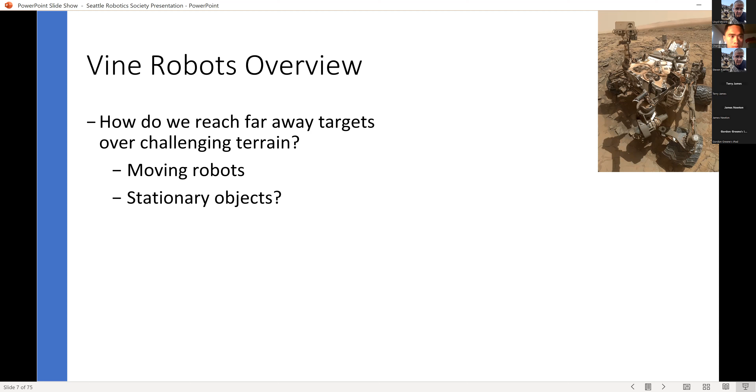But there are other things that navigate challenging environments—what about stationary objects, things we traditionally think of as stationary? In biology we have cells, and cells and plants get to navigate their environments by growing towards them. For example, a nerve cell, to grow to a new area, grows through the tip, navigating through all these cells. In the plant world, you can think about pollen tubes reaching the egg of the plant—these tube organelles grow towards it, allowing the sperm to reach the egg.

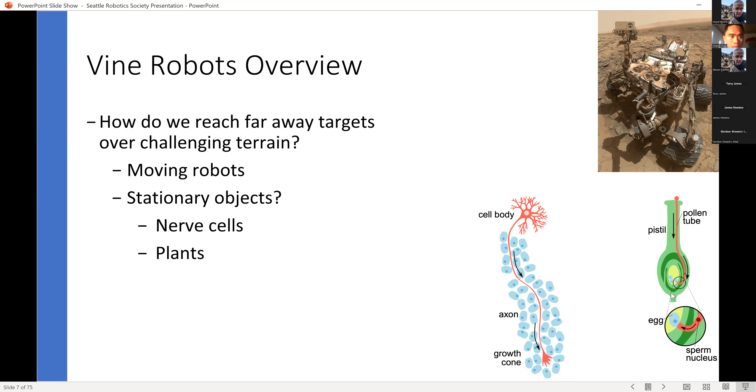So how do we implement growth in our lab?

So we have basically an inverted tube. You can think of it like a sock. When you roll a sock in and out, you get this nice sliding motion that allows you to grow towards a target.

So to robustly grow, what are the advantages of a design like this? Well, one, you're growing from the tip, and you're really not sliding the whole body. If you think about it, like sliding something against a whole bunch of rocks, you're going to get a whole bunch of tears. So if the object is stationary relative to the environment, you're not going to get all that drag from the environment, and you're not going to get caught up with all the detritus on the ground or in your environment. So that enhances mobility quite a bit.

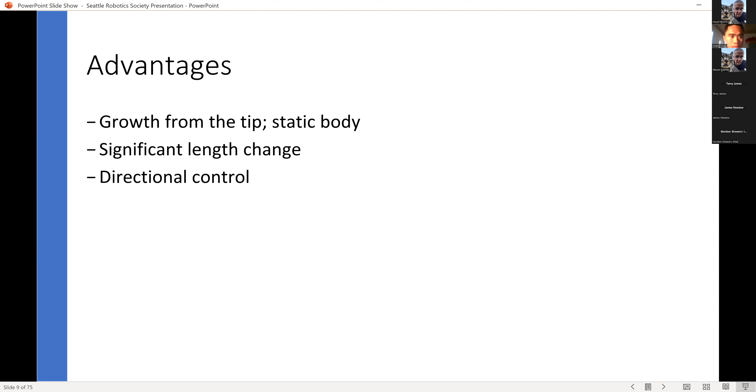Secondly, you can get huge length changes. You can grow these things to tens and tens of meters. And you can also control these because they're quite soft. You can easily control the direction of the motion of these robots by simply changing the strain on each side.

So here's some demos of these robots in action. You've got these robots steering towards all sorts of different targets, and how they steer is they have these pneumatic-based muscles on the side. These pneumatic muscles work as basically a simple pouch, and when you inflate these pouches, they contract in length because their volume increases, and that leads to contraction. By straining and shortening one side, you turn towards that side.

Did that make sense to you all? Okay, I've got a question.

Are you contracting the entire length, or do you have some way to control at which point along the device you're doing this contracting? That's a great question.

I'm not too sure about this particular example, but you are controlling individual segments. Usually you would control a length of the robot. It can either be the whole robot, or if you put a lot of different tubes in, you can control more segments of it. Basically you have to run tubing up there so that you have regions. In this bottom right example, it's definitely making two turns, so there will be at least two sections of tubing for that to occur.

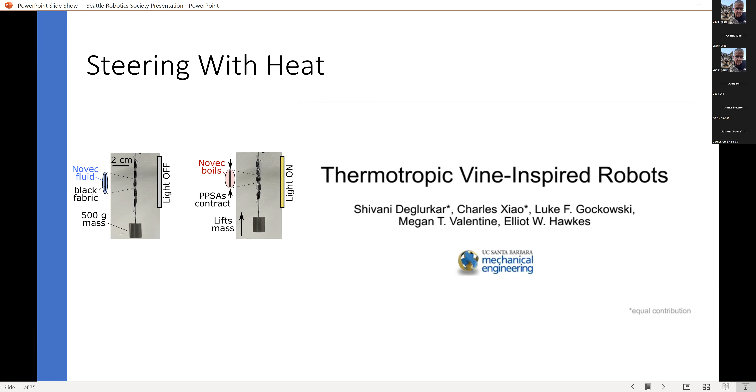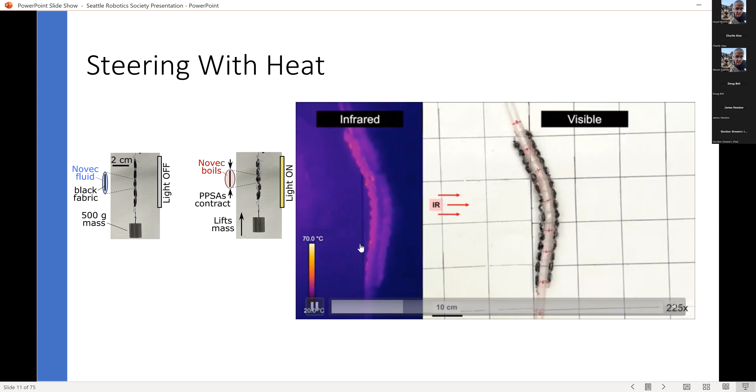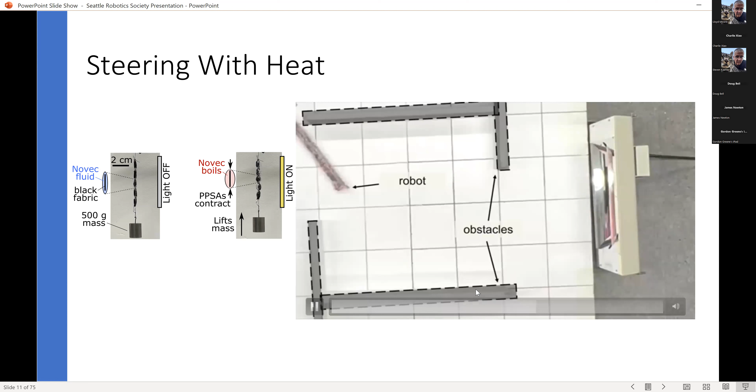This is something I worked on actually fairly recently. Here's a nice video of these robots responding to a localized heat source. You can see how each of these individual pouches have different amounts of heating, and it leads to slightly different amounts of curvature of the robot. Here's some demos of the robot steering towards heaters.

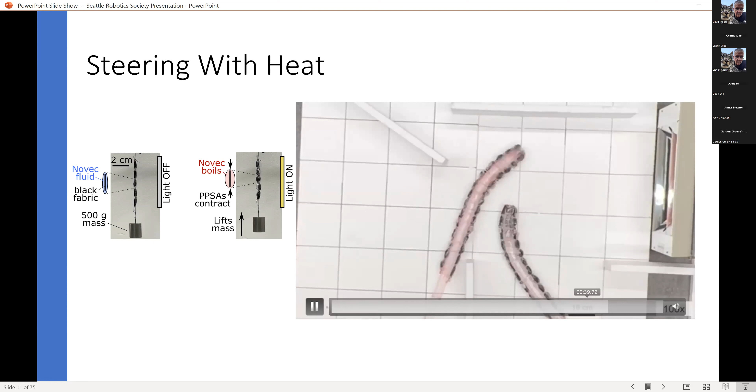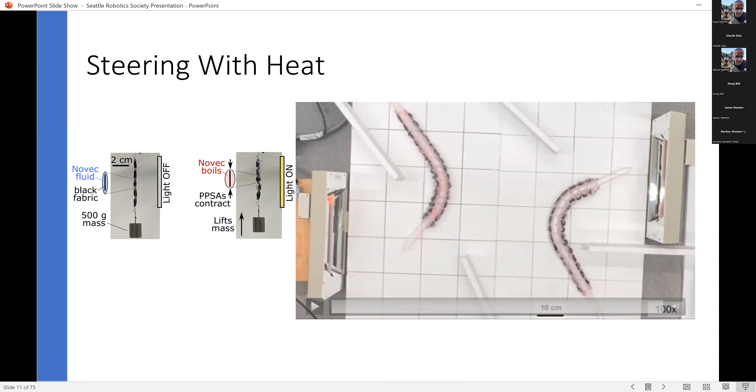So this is some work I worked on over the last year, fairly recent work. Okay, so what are some applications for these robots?

One application is that these kind of remind you of roots. There's tons of naturally interesting reasons you'd want to explore stuff underground. Turns out there's a lot of interesting stuff under the ground in places like Mars and icy moons around the gas giants, so there's all sorts of interesting stuff that geologists are fascinated about. So how do we go underground?

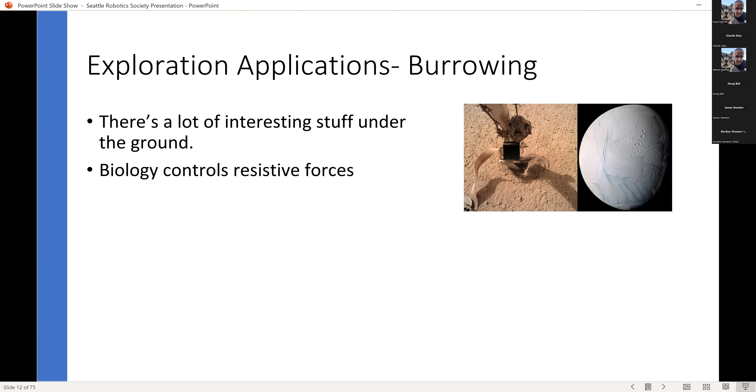One approach is to look towards biology. The way biology burrows underground is by controlling the ground reaction force in the soil, and they do it with three different mechanisms. You have tip extension—if you think about roots, in order to go through all that soil, sliding a root through the ground would take a huge amount of force as it grows through. Then if you look towards animals like the octopus and some types of clams, they do fluidization—they change the adhesive forces the soil has by blasting a jet of water into the sand.

And then with animals like this, what is it called? The sandfish. Yeah, sandfish. They have, their body is asymmetric, so that they can control the ground buoyancy force of the sand around them.

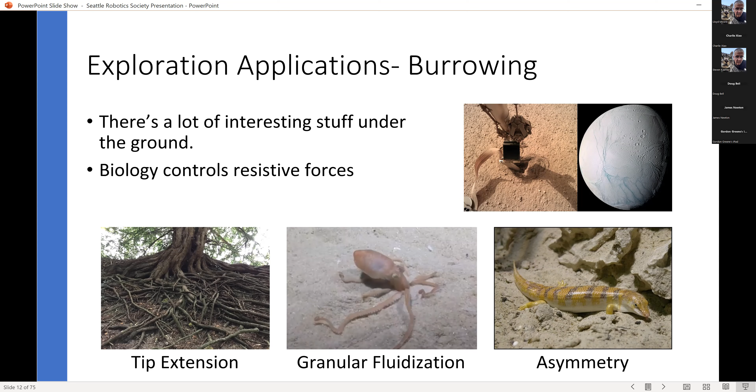So how do we do this with vine robots? Basically, we have three principles. We have tip extension, which vine robots naturally give you, so because you're growing from the tip, you're not sliding through the sand. We also have this wedge that gives you a bit of asymmetry, so you stay underground. And then tip fluidization, so you can control how viscous, how much drag the sand gives you around you.

Related to that, we also have a bit of directed flow. What's interesting is, to stay underground, you actually have to point the jet of air downwards rather than upwards. The reason is that in sand, in granular media, the buoyancy force is a little different than in water. The buoyancy force comes from the difference in lithostatic pressure, and by fluidizing the ground below you, you free up the sand, which reduces the force required to penetrate downward. That prevents the sand below you from pushing your body up, so it keeps you below ground.

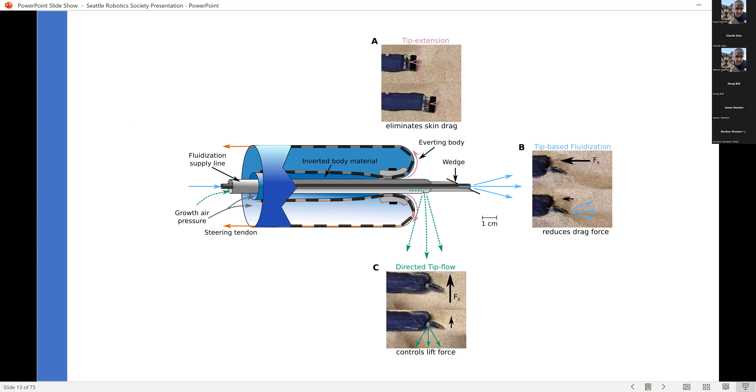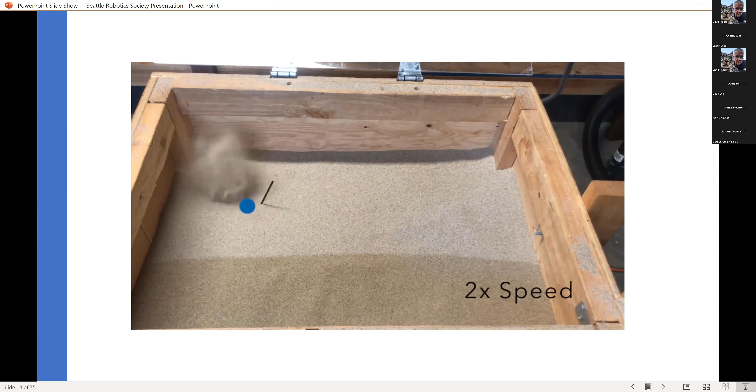So here's a demo of the robot navigating through an obstacle course in the sand. I should have highlighted the obstacles, but there's a whole bunch. This is going through a bunch of sand, and it successfully travels through by growing, and here's where it's fluidized. You can see the sand going all over the place. So we're currently investigating.

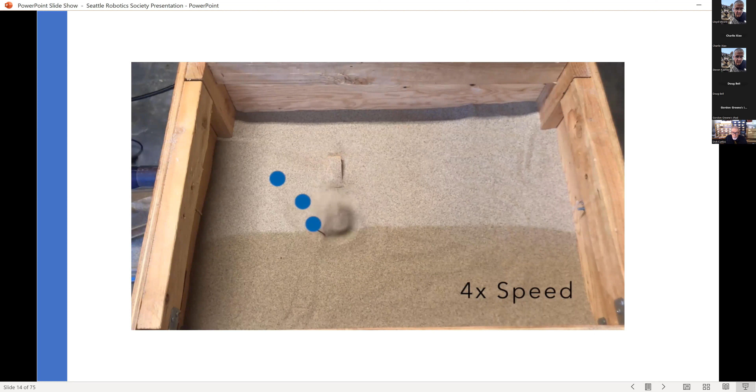How to use these more for future exploration missions on the moon or Mars, and hopefully we'll do some 0G tests. One of my colleagues is working on that.

Another thing we're working on related to growing is trying to put ground anchors into the soil. For example, you might want to put a seismometer underground or a temperature probe, and we're trying to figure out how to burrow deeper. We're looking at adding root-like structures, hair-like structures to these vine robots, so we can get a little bit better anchoring into the ground.

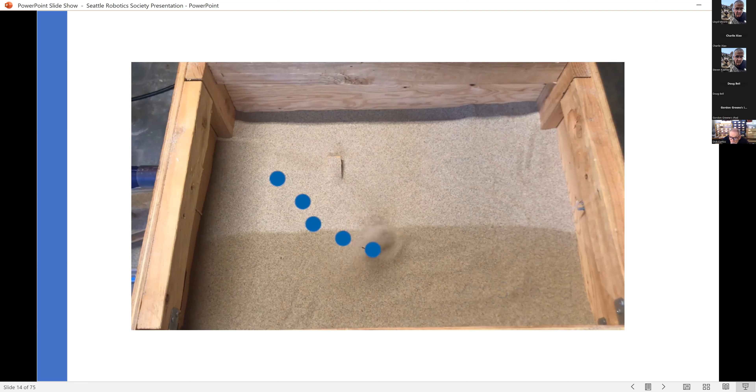The next applications we want to think about are medical applications. If you think about the body, there are a lot of really challenging places to get to. One obvious place is your stomach, right? When we do a colonoscopy, you have to go through the colon, and that's a pretty challenging environment to navigate. Those are potential extensions, and also different vascular structures in your body.

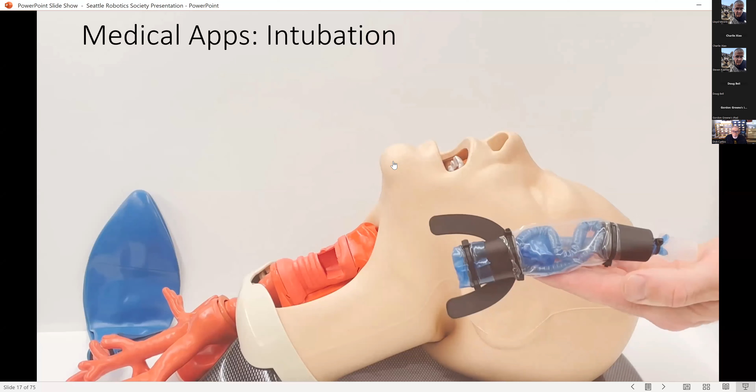We have a whole bunch of different collaborations with medical institutes working on developing vine robots for medical devices. But the real big focus right now in our lab is intubation, trying to get airway management for when we can't breathe and you need forced oxygen into your lung system.

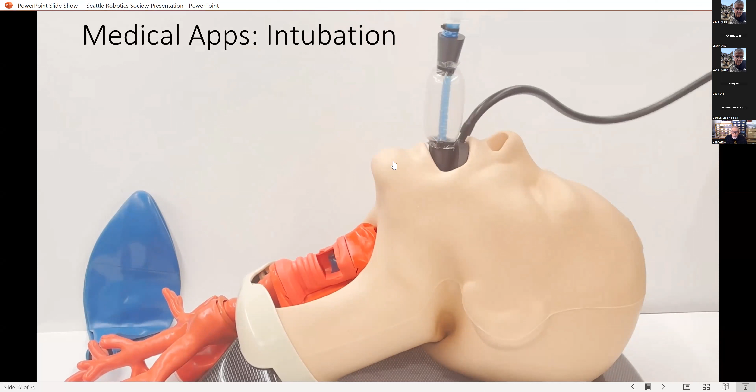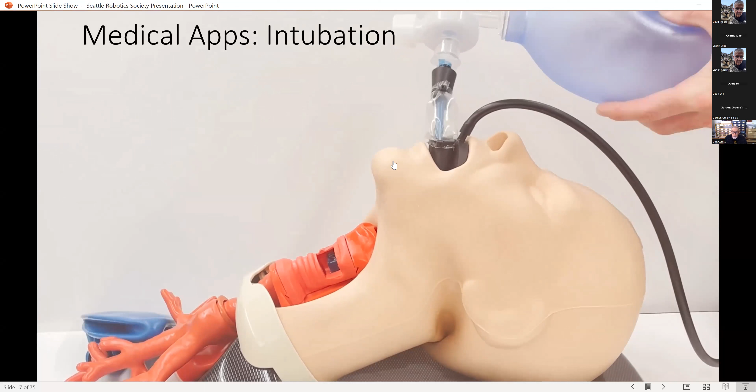So here's an old prototype of a device that can navigate through the throat and get air into your lungs. This is an early prototype, and I can tell you, well, I don't know how much I can tell you, but the prototypes are much more advanced now, and we've done some cadaver testing. So hopefully in the next couple of years, we'll see a vine robot intubation device out there in the market. Hopefully none of you will actually have to use it or get used on, but hopefully we'll have something out there.

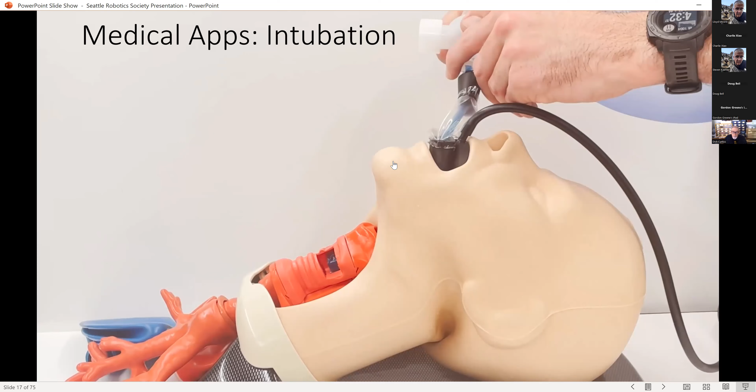There's also a ton of vine related stuff we've done. You can find more about them in this nice Veritasium video going over what we've done as well.

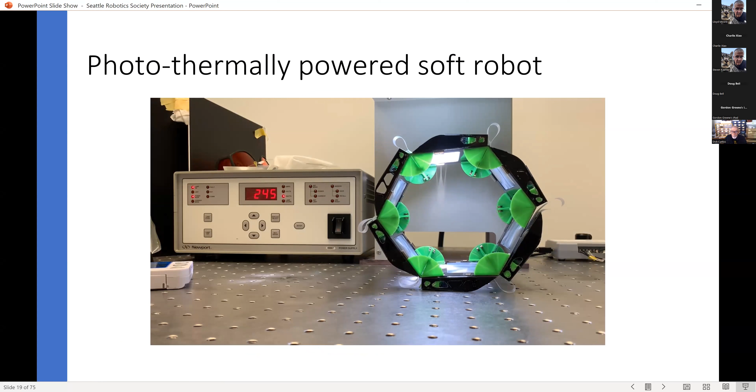So, other stuff we've done: here's an example of a photothermal powered soft robot, in quotation marks 'soft,' where we're trying to figure out how to harness the natural world around us to power these robots. Here's a robot that flips using a pouch motor with phase change fluid, flipping over based on this input. We're trying to figure out how to design these soft robots to operate in the world around us.

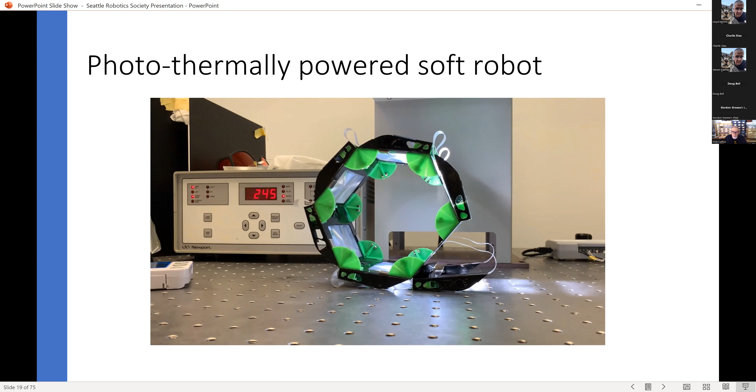The other thing we have is controlling soft robots—we're working on controlling soft robots.

The challenging thing about soft robots is they technically have almost infinite degrees of freedom because they're continuum systems. So they're challenging to model, and the manufacturing process for these robots is very artisanal, I guess, one way to describe it. So there's a lot of variation between these soft robots, and they're hard to model to get all the modeling correct.

So we're looking at using something like the Koopman operator, using Koopman operator theory to do model predictive control for these robots. I'm not too familiar with Koopman theory, but from what I understand it's similar to a Kalman filtering method. So we got some nice results controlling these soft robotic arms really fast. I think hopefully we'll have a paper out in the next couple of months, so be on the lookout for that.

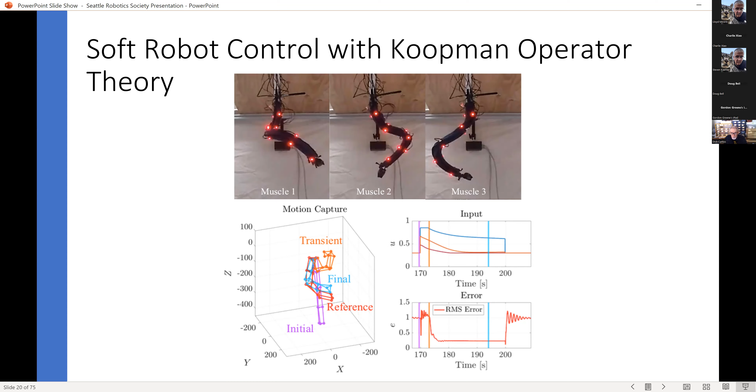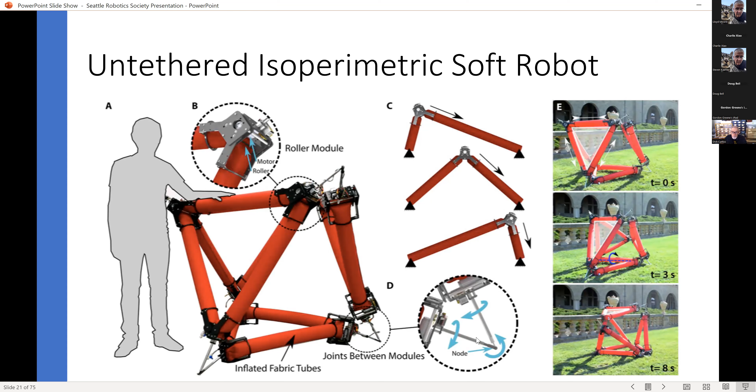And then we have the untethered isoperimetric soft robot. This giant robot basically works by having a whole bunch of fixed tubes, and by changing the position of these nodes right here, you can change the shape of the robot, and that allows you to roll around and navigate the world. So we're working on that a little bit right now.

The reason we're looking at this is in comparison with drones - drones are very good at being agile, but the problem with drones, like quadcopter type drones, is they're very energy intensive. So can we get something that's as efficient as a glider or fixed wing aircraft, but can also be just as agile? We're trying to see if we can do a jumping motion in midair to get the best of both worlds.

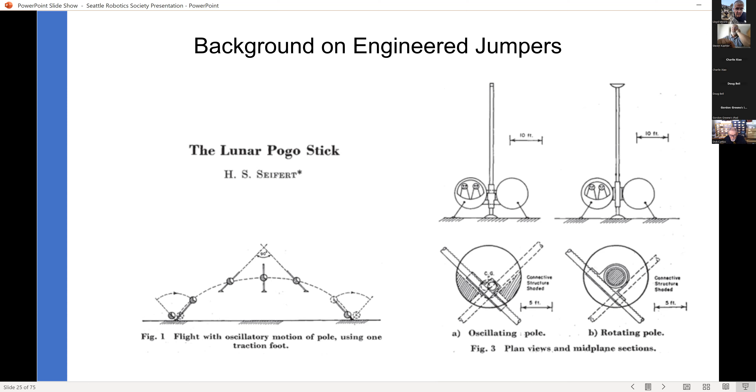And that's inspired a whole bunch of researchers to look at building these jumping mechanisms and jumping robots for all sorts of applications. But most of these applications have really been focused on bio-inspired jumping robots. If you look around in the natural world - kangaroos, frogs, and grasshoppers - they're all really good at jumping. A lot of people have been trying to base their designs on being as bio-inspired as possible, and naturally that lends itself to a lot of people creating a whole bunch of models of biological jumpers.

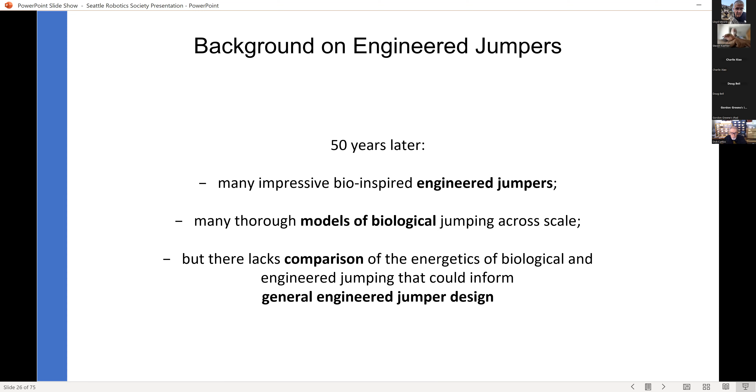And models are pretty complete out there, but a lot of people haven't really been thinking about what is the real difference between biology and engineered systems. We're fundamentally just different - we've created things that are fundamentally different than what is out there in biology, so we can have different capabilities. That leads to the two questions that we have in this project.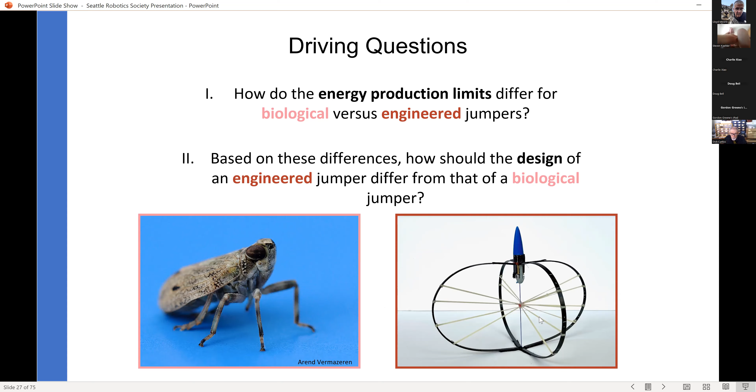So in this part, the talk is going to be divided into 3 parts. First is we're going to talk about the production, the fundamental differences between biological and engineered jumpers. Then we're going to talk about the design of these jumpers, and then we're going to show some cool videos of those jumpers in action.

So, okay, first question: what is the difference, right? So let's first begin at the big picture. What is the model that we use for understanding this problem?

Basically, jumping can be divided into 3 phases. One is the pre-stretch phase, where you load up your legs and springs. Second is the actual jumping part, where you're jumping, and then you're in flight.

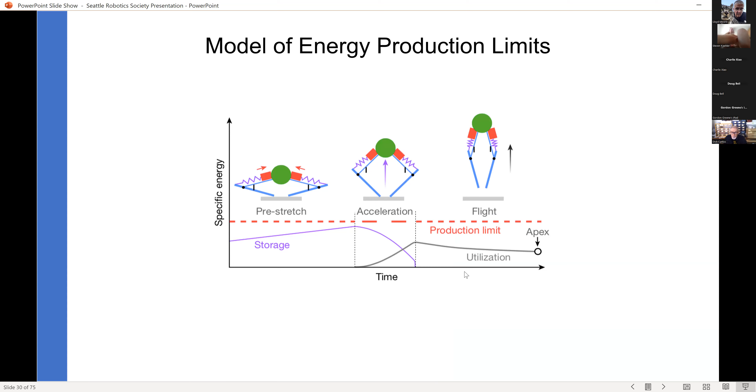So there's typically 2 ways of achieving a jump. One is a direct drive type system, where the motor directly drives the linkage, and that's basically how you jump.

Technically there's a bit of tendons, but mostly you're using your leg muscles to drive the jump. The other common type is a spring-based design, where you use a motor or muscle to store up energy in a spring, and when it's time to jump, you release the spring and you go off. That's the type of jumper that we use for our system.

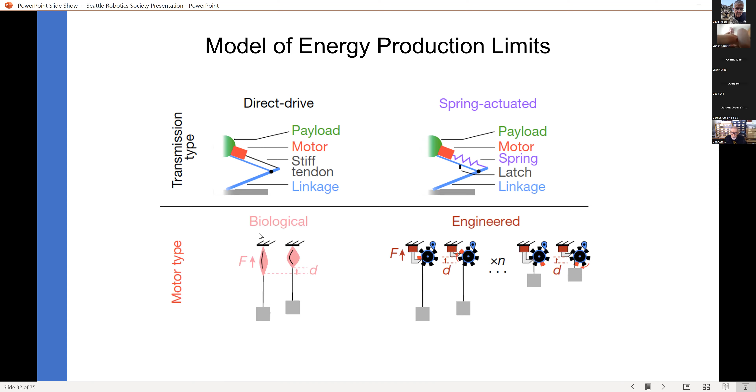Then there's different motor types. There's the biological motor, which can only do one stroke, and the engineering jumper, which has rotary motors and stuff. So basically, the big difference between biological and engineering systems is biological motors can only do one stroke.

Once you contract your muscle once, you really can't contract it anymore. But if you think about the rotary motor, you can keep on spinning that motor almost for infinite time and keep on doing work. You're only really limited by the energy supply and the wear of the motor.

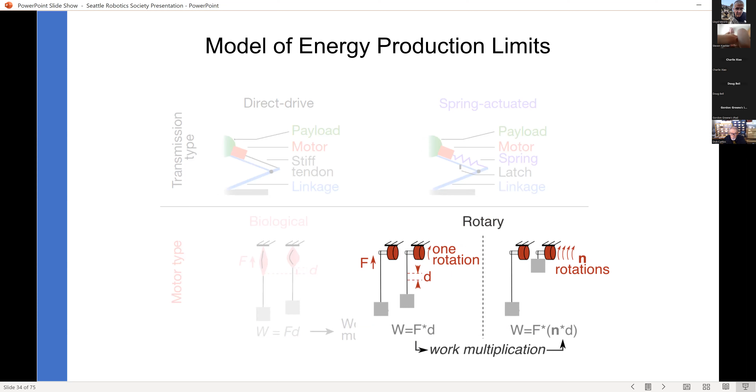This leads to a concept we call work multiplication, just because by the fact that you can spin a motor over and over again, you can produce incredible amounts of work, and basically that drives the fundamental difference between biological jumpers and engineered ones.

So basically, biological jumpers are limited primarily by their motors. They can only do so much work, but with an engineered system, the upper bound is almost infinite. So the jump capabilities of engineered systems are just limited by how much energy you can store into a spring, and for biology it's just how much energy the motor can put into the spring.

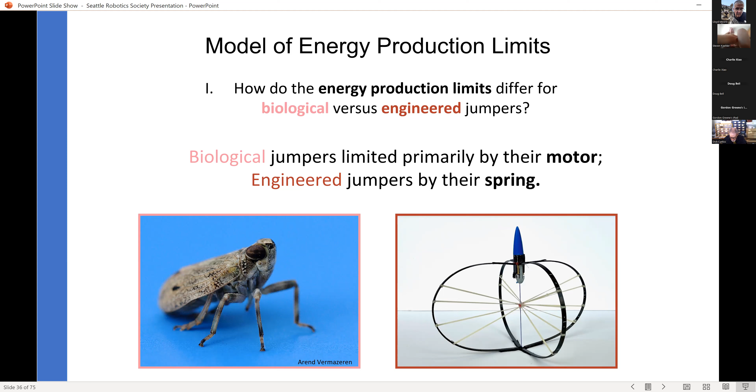So then we're going to talk about the models a bit, an overview of these models. Because you can only store so much energy, you can't really store more than about 200 joules per kilogram of energy into the muscles for biological systems. Eventually you just saturate out - even if you allow your muscles to run for a long time, you just can't produce more than that. But with engineering systems, you can just basically go on forever.

So then, how does this affect the system if you use a spring? What a spring does is it allows you to store energy. If you're a small scale object, your legs are short, so your jump time is going to be very short. So if you want to jump very high, you want to be able to store that energy into a spring - the spring allows you to decouple a bit from the power and duration of the motor.

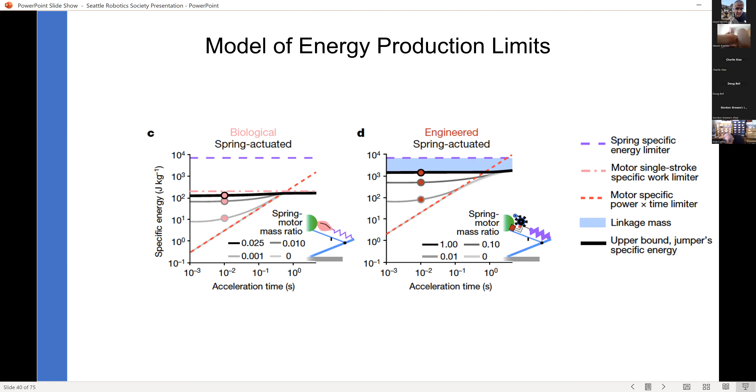So basically, what are these insights? What does that lead to? For biological systems, you should still use springs if your scale is below 1 meter. But once you get bigger than that, you should use muscles. So if you think about locusts, they're spring-based jumpers. But once you get to larger scales, like human-scaled dogs and kangaroos... well, like humans, we're really jumping with our muscles. That's because we just can't store a lot of energy into the springs.

But for engineered systems, because of this work multiplication, we can use springs into incredibly large scales, up to about 100 meters. If you build robots up to about 100 meter scales, they'll benefit from using a spring-based system rather than a direct drive system. And then once you get over that, a motor-based system would be more advantageous.

I have a question. This length you're talking about, is that the length of the robot or the length of the jump? Great question. That is the length of the robot, essentially leg length.

So basically, unless you're building a 100 meter robot, you're going to be using springs to jump. That's kind of a little crazy to think about.

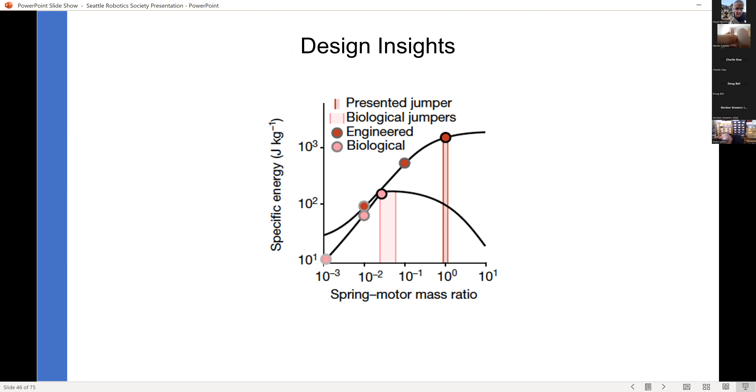So basically, how you can improve your jump heights. For biological systems, the more energy you can produce from your motors, the better you're going to jump. The more energy you can put into these springs, the higher you will jump. So having better muscles will increase your jump capabilities. But you notice here, you don't see the engineering mechanism limit. That's because you have this work multiplication effect. You can keep on producing work. So there's really no concept of specific work for engineered systems, because you can keep on running that motor forever.

And again, because you're storing energy into a spring, it doesn't really matter how powerful your motor is. The amount of energy you store, you can always gear down your system and you'll store more energy.

But really, the big effect here is how you can jump higher. For engineering systems, you want to have as much high specific energy as possible. So the better spring you have, the better you're going to jump for engineered systems. But because in biology your muscles are only so good, they only can produce about 200 joules per kilogram, having a better spring doesn't really make you jump higher. It actually doesn't affect you at all. You just can't produce enough work to take advantage of the better springs.

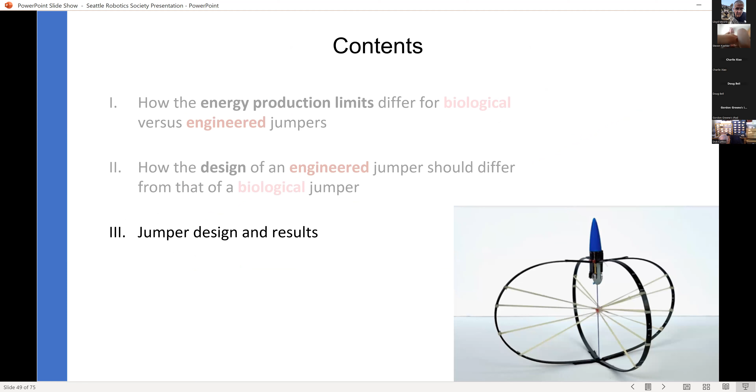So how do we actually use these insights to build a jumper? Well, naturally we maximized our spring mass to motor mass ratio. And to drive such a big spring, we had to use a really small motor. So our motors were geared down to 1,000 to 1, and most of our jumper was basically a giant spring.

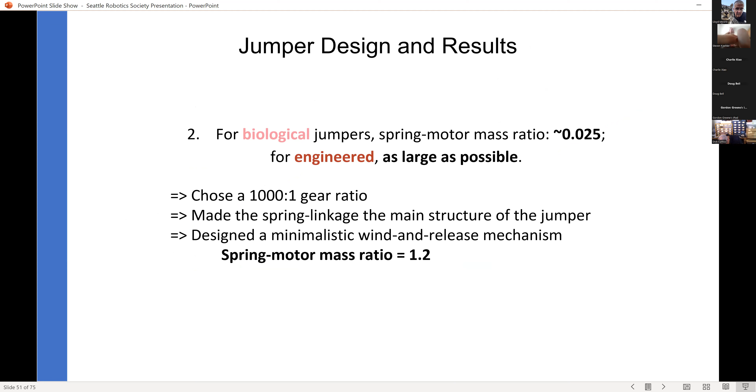So what does it look like? It's not really much of a robot in a traditional sense. It's basically mostly spring right here. So we have these carbon fiber segments, which form our springs, and then these rubber bands, which I'll go into a little bit later. And then the construction is actually fairly simple.

We used these Pololu motors and a fairly simple latch system. All these hinges were actually made from fabric, and there was quite a bit of super glue holding this all together. You could probably build one of these in your garage. It takes some finessing to build, but they don't really require that much special equipment.

Just on that last slide, give us a sense of the size of what we were looking at there, like those spring segments - how long are those? So these are about 30 centimeters to about a foot long. Pretty short then. 12 inches, and then there's 4 of them. So in total it's a little over a foot, but these spring segments are about a foot.

All right, those are tiny motors then. Yes, these are the tiny Pololu motors. Have you seen these Pololu motors before? I'm not familiar with them. Just looking at it, I would guess the motor itself is 1 inch long and the gearbox is 1 inch long. Is that about right?

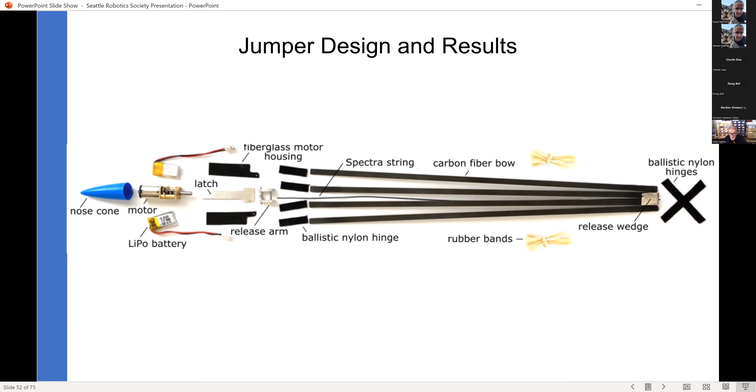Yeah, they're incredible. So I'm guessing you're going to use a string that's wound on a spool. Where is the spool in this drawing? Let me go to the next slide. So the spool is actually the motor shaft. So we're winding the string on the motor shaft, right? And that way we increase our mechanical advantage of the system. If we had an actual spool, then the 1000-to-1 might not work for the system.

And then the release mechanism is pretty simple. There's just a wedge on the string, and once the wedge goes past the latch, it releases the swing arm, and that pull drops the string off the shaft, allowing the robot to jump. So it's a fairly simple part, simple design.

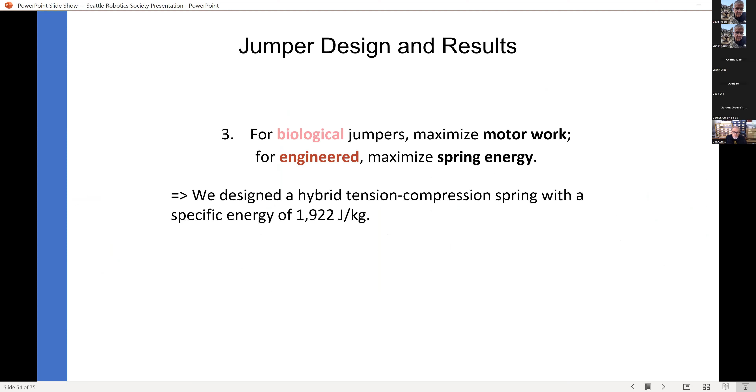So then the next thing we have is a spring that has an incredibly high energy density - about 2,000 joules per kilogram. So going back a couple slides, you noticed these rubber bands. What do these rubber bands do? For these springs, you can imagine like a carbon fiber bow, and the rubber bands are tied across the carbon fiber bow. What that does is it reduces the peak stress seen in the carbon fiber bow.

So a cool fact about these rubber bands is rubber actually has one of the highest specific energies out there - it's one of the best spring materials available. I think it stores about 2,000 joules per kilogram. The reason it stores so much energy is because even though it takes a little bit of force to stretch it, you can stretch it for huge distances, so you get large strains, which allows you to store a large amount of energy. So if you want to jump high, use carbon fiber and rubber bands.

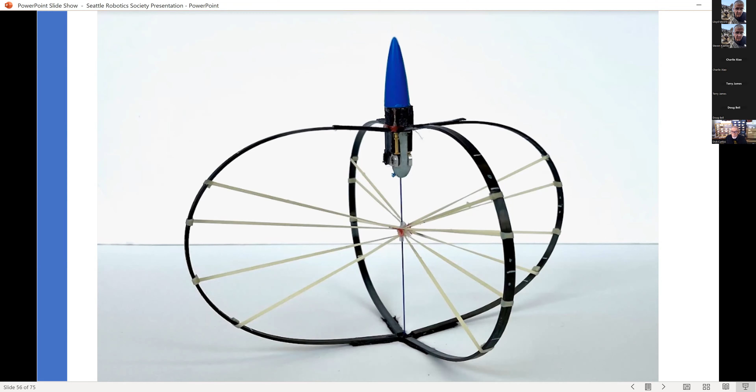So here's some videos. Here's a slow-mo of it taking off. Whoa, yeah.

Yeah, so it's quite a violent takeoff process. In that last video, you notice how the rods slam into the center—that's actually one of the sources of failure for these, they fracture after repeated jumps from that slamming motion. You get about 300 G's of acceleration, which is incredible, right? You're going from 0 to 28 meters per second in 9 milliseconds, so it's an incredible acceleration.

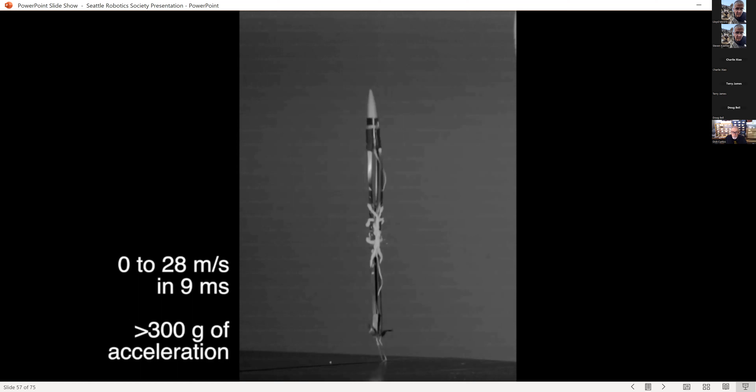Can you go back to the initial configuration? How far down does it compress? Let me... this one. How far does it compress? It never goes more than that—that's the minimum compression we're seeing.

It's basically, well, it's still elliptical, but not much farther than round. You don't get down to flat at all—by the time you do that, you're just breaking the rods.

Oh sorry, I'm just clicking by accident. You're always like that semi-pumpkin shape. And then here's a picture.

So here's a video of it jumping over 30 meters, over 100 feet. You really can't see anything, it goes by so fast. But then it ends with—hold on.

Yeah, so here's it highlighted—these black lines superimposed onto the image, highlighting where the robot is. So the robot's a lot skinnier and shorter than what's highlighted here, but we can get these things to jump about 100 feet, or more than 100 feet actually.

Would you say that the ratio of mass of the mechanism to the spring is such that it likes to stay pointed toward the nose cone? In other words, are you doing the thing you do with a skyrocket that keeps it pointed in the right direction?

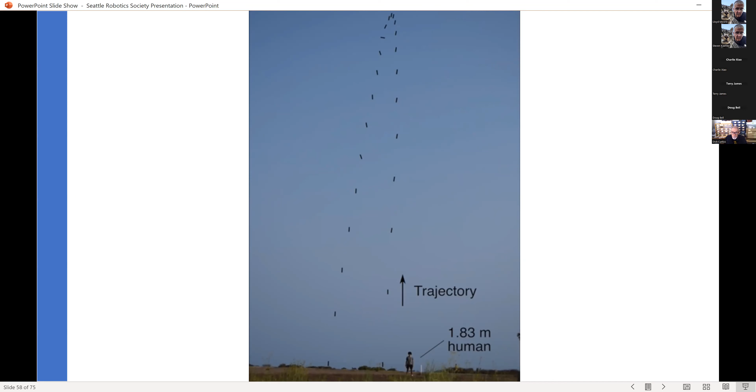So to answer that question, it's definitely not super intentional. I mean, in other words, it doesn't tumble. So it's top heavy for two reasons. One, it turns out the distribution of mass is very important - the more mass you have above the spring, the higher you're going to jump, because your average center of mass kinetic energy is higher. So that's why we're top heavy, and that's just a nice consequence. The stability is a consequence of that design choice. We didn't really design it for stability reasons, but because of average center of mass velocity reasons, it is top heavy, and that gives you stability.

Does that answer your question? Yeah, yeah.

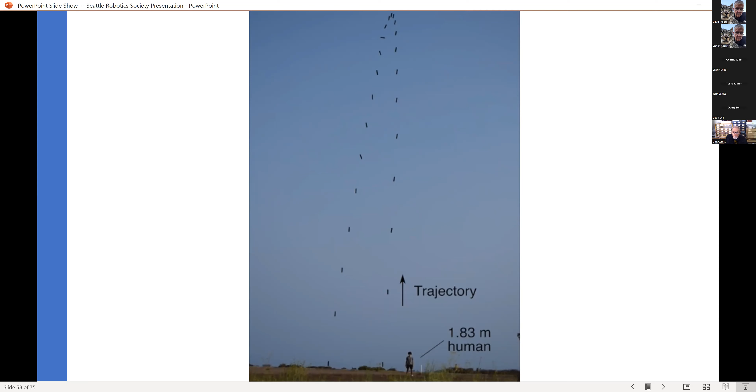And then self-righting concepts - you can also get self-righting by having these extra bows, these split bows. The green bow is actually two parts. There's one part that is not connected to the rest of the bow, so when it starts bending, it splits off, and then you get this little foot kicking down to the ground, and that pushes you back up.

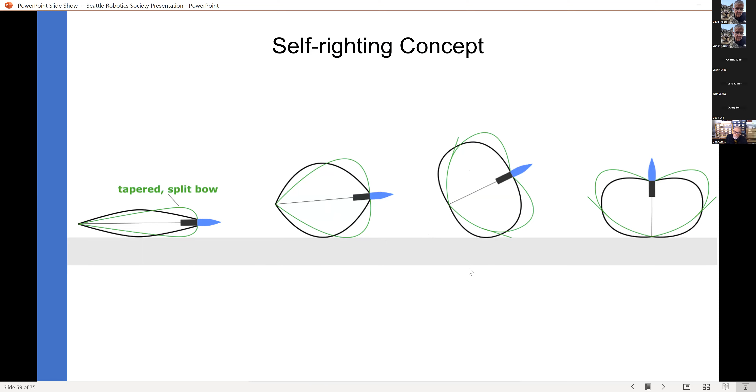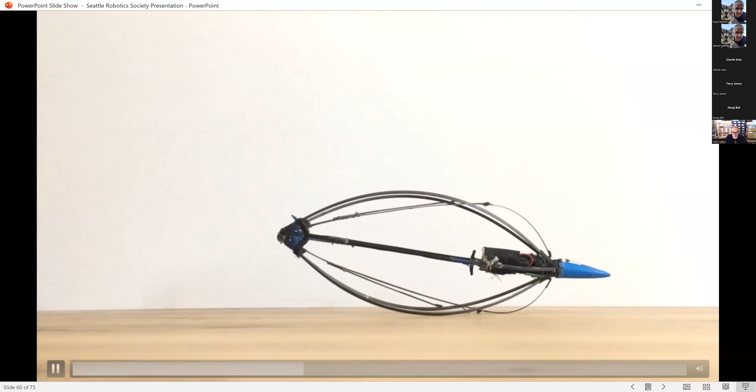So here's the robot self-righting indoors. And then that self-righting allows you to jump by itself over and over again.

How much do you think you could scale that up before the strength of the materials involved put a limit on it?

And of course the acceleration forces put a limit on it. I'm not quite sure about how much the acceleration forces matter, but for static cases, I think these can go up to a couple tens of meters in scale, so you can go quite a bit bigger. You can go a lot bigger, but you're not going to really jump much higher. You will jump higher, but it's not significantly more - this design wouldn't get you to jump a mile or anything.

No, but if you put it on the moon, you might.

Is there some kind of a controller on this thing, or how does it - it was laying on its side, and then the motor was obviously contracting to right the thing. How is it doing that? Just sort of an automated sequence or something?

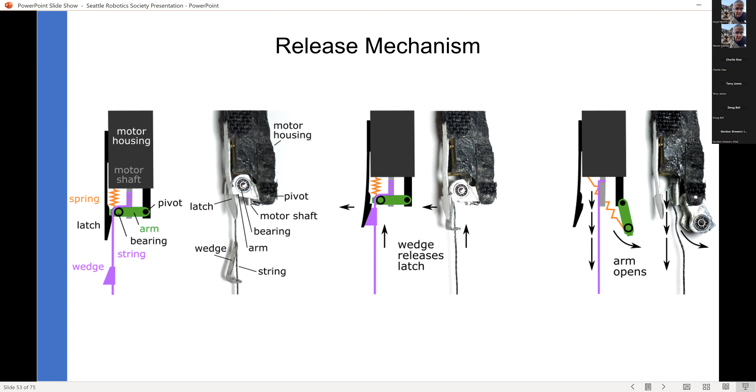Yes, because there's so much tension. The string is pulling the arm downward, and the latch prevents that from happening, because the string's under tension. The string pulls the green part down, and then the orange spring brings the green part back up. Yes, that's correct.

So this is indoors, and then here's it outside, with onboard cameras. All right, self-righting outdoors. So here's the jumper, and then it'll jump over there.

And then it can start winding itself up because of that spring, which allows it to reset, and then it's about to jump. Then it jumps again. So are you actually able to control the angle?

So in that example, it's actually angled inward towards the cliff. So does your self-righting mechanism allow you to adjust one side versus the other so that you can get the angle you want for your trajectory? Yeah, you can tune that mechanism so you can get the correct angle that you want it to jump at.

So it just keeps jumping over and over. How many jumps have you done in a row? That's a good question. I think it's 10 or so, we've done about 10 or so jumps.

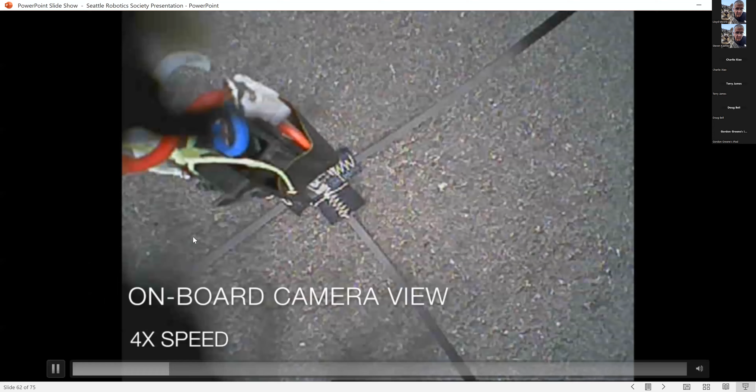And then here's a video of an onboard camera. We use one of these drone cameras, and then it can jump, and you get a nice aerial view of the ground, and it flies, tumbling towards the ground, actually getting caught. And then here's a video of it flying by. This is actually our building, and there's another video of it jumping and flying by.

And here's a cool video of it jumping off a table. And it's strong enough that you haven't had much in the way of having to put it back together after it's landed.

Yeah, and that's because it's very light, right? So a lot of these jumpers are on the order of 30 grams, so the aerodynamic drag on falling doesn't give it enough terminal velocity to be significantly damaging. Do you use a compliant nose cone? No, we do not, it's basically a rocket engine nose cone, so it doesn't really land with that much significant speed to really damage the robot.

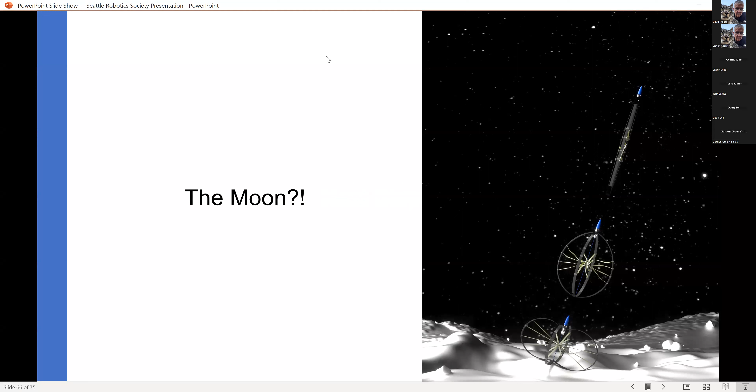So what's next? If you can jump 100 feet on Earth, you can probably jump 600 feet on the moon, so we're really trying to see how we can take these to the next step and make these practical for space applications. So currently we've got a senior design team working on it, here's the team right here. They're talking to some people at NASA about their work, and their work is mostly focused on attitude control, like how do you actually steer, how do you control the direction the robot points at when it's in space.

So right now, in space you have no aerodynamic forces to stabilize your robot, so if you have any off-axis torques applied during takeoff, you're going to be tumbling. We need to figure out how to do that, so most of the work has focused on simulation. Another thing students are focused on is steering, how do you point the robot before you jump, and finally how to capture the energy on landing, because there's no air resistance on the moon, so falling from 100 or 600 feet is a lot of energy, and it's going to be damaging.

But also, because there's no air resistance, you can potentially capture it and extend the range of travel. There's also some questions about how to improve the springs, how to jump even higher with the materials we have.

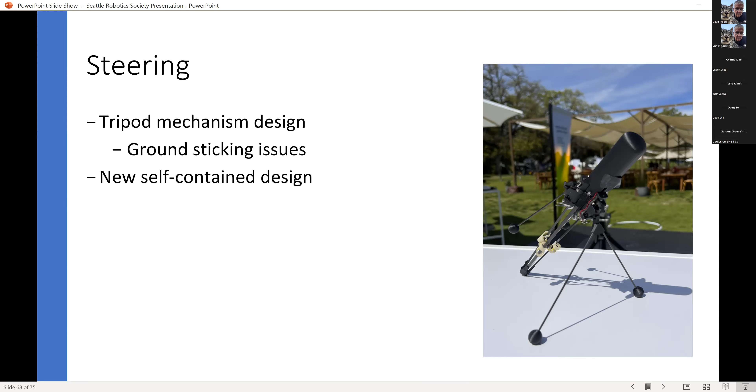And secondly, landing. So the next question is, how do you capture the energy upon landing with the springs, to increase the range of the robot? It turns out you can't really land with the legs in a straight configuration, because the spring compression really affects how much energy you can capture on landing.

This dynamic buckling effect is also what allows staplers to work. If you've ever noticed when stapling a stack of papers, if you go really slowly, you're not going to get the staple through, because the staple buckles. But if you hit the staple fast, it goes right through, because the staple can't buckle. The buckling force is dependent on the speed—the higher the speed, the more force it takes to buckle.

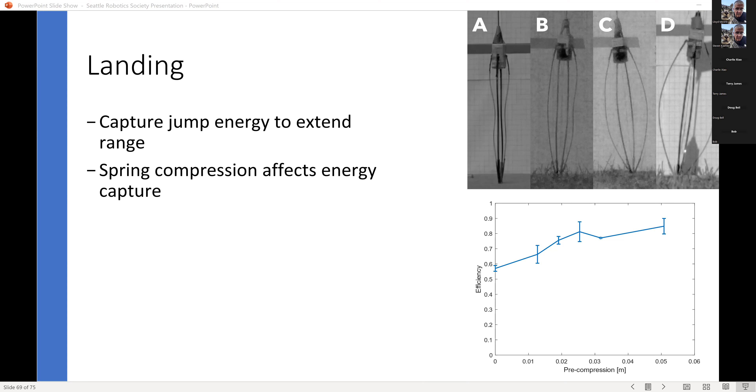Related to that is the other thing we're talking about: how to improve the spring design. The material upper bound for how much energy you can store is about 8,000 joules per kilogram, but as you noticed in the previous plot, we only go back to 2,000 joules per kilogram. Further than that, these jumpers don't even use all that energy because they take off before the spring is fully straight. So the question is, how do we get close, how do we maximize the energy we extract from these springs?

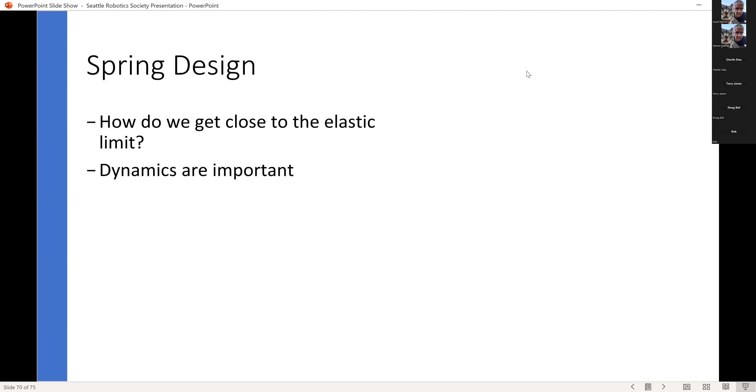It turns out the dynamics of the springs are important, especially when your jumper is mostly springs. So one idea is instead of having one truss, we have multiple smaller trusses, and that limits the dynamics, the inertial forces that the foot experiences.

So this is an area of ongoing research. We're trying to see what other tricks we can play to get even higher jump heights.

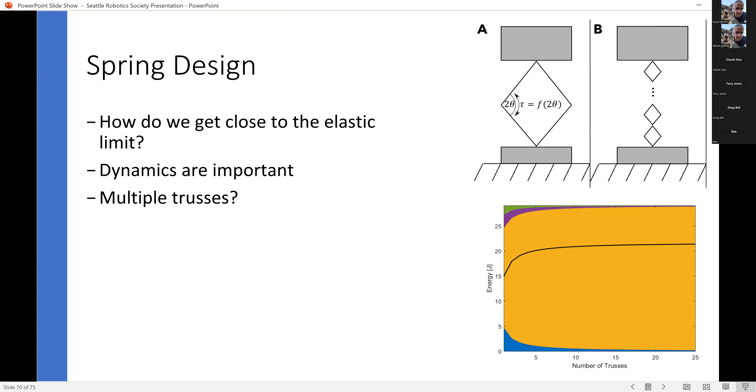So, thank you for listening. Any final questions? Any questions? Outstanding presentation, thank you. Thank you, it was excellent. Yes, thank you very much.

I wanted to mention, for your vine robots, you could imagine brute force having a 3D printer inside a tube, printing new tube. By controlling how the 3D printer printed the tube as it was being created, it could be stronger on one side or whatever it would take so that it would go in the desired direction at the point of extension. But you could also imagine having a reel of deflated tube fed through the center, and just before it left the nozzle, you could make changes to the tubing so it would go in the desired direction at the point where it folded out. Did that make sense?